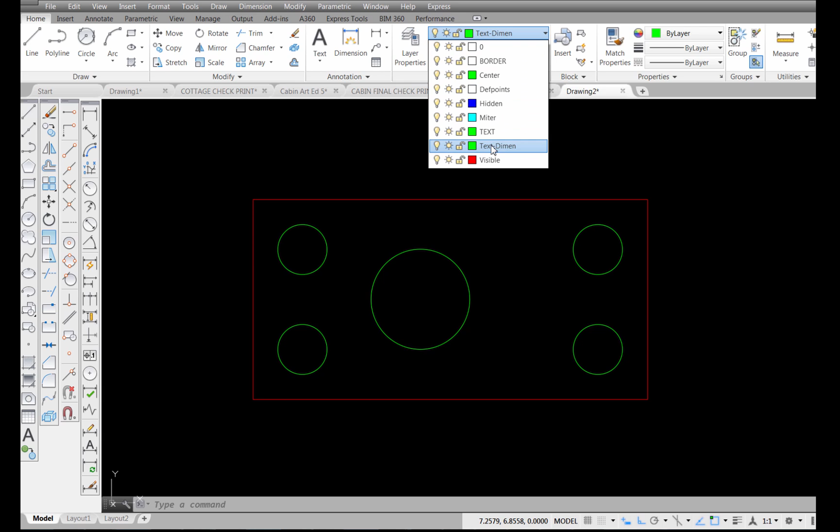One thing I should point out is that I've made a layer called text dimension that I made earlier. I've made that my current layer. I'm going to pick on the tool and come over here and select on the edge of the circle, and you can see it draws a plus sign in there to indicate where the center point is.

Now usually we like to have a center mark that has some lines that extend out from there, and of course that's not what we're getting here, so I'm going to delete that out and show you how to get the center mark that has the lines that extend out from it. Again, like I said, I have my dimension toolbar open.

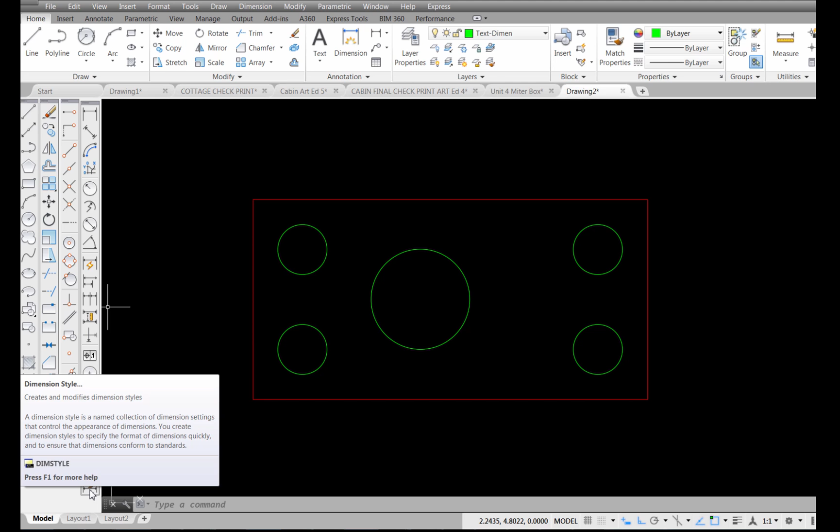The very bottom icon right down here is the dimension style manager, and if I click on that, it's going to open this box up right here that allows me to go in and change my dimension styles. Now you have one called standard, and what I'm going to do is modify the standard one. That's just the default one, so I'm going to pick on the modify button,

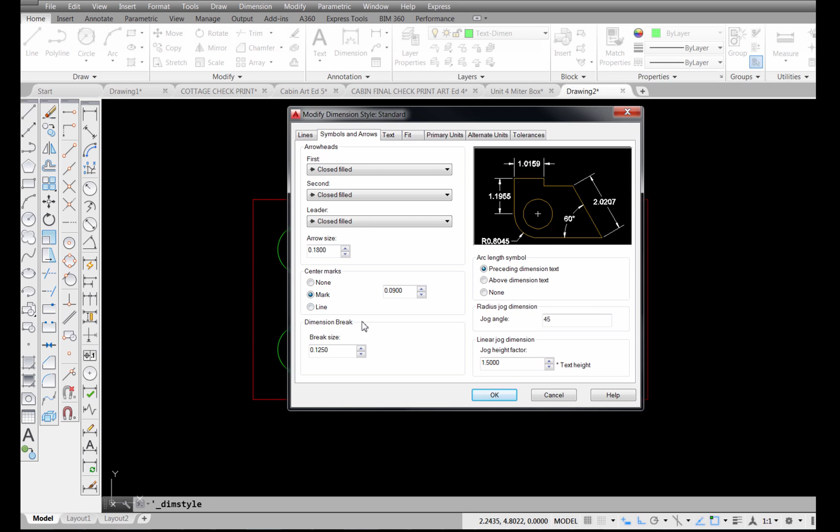and then there are some tabs across the top. Pick on the one named symbols and arrows, and you can see the little plus sign that I have in here. That's because under center marks, just the one for mark, this button is checked. If I pick on line, you can see how that extends that out. So I'm going to choose OK after I do that and close.

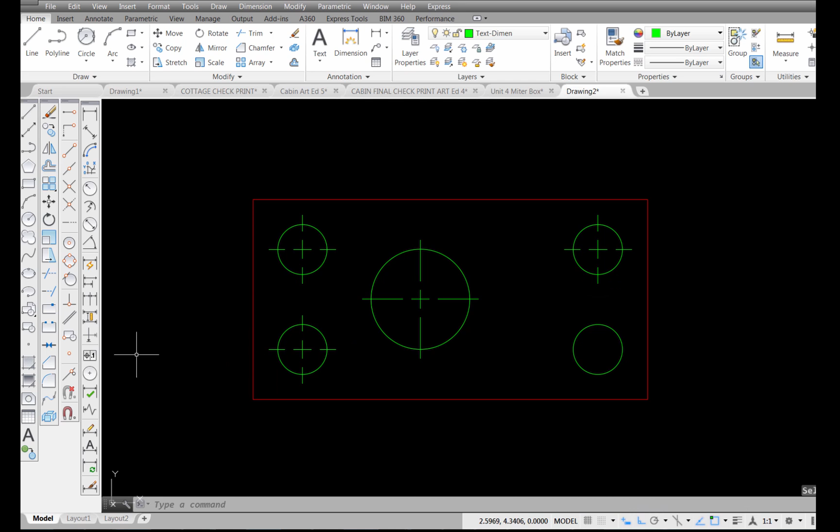Alright, so now that I've made that change to my dimension style, if I pick on the center mark tool and select the edge of the circle, you'll see what I get here is a much nicer center mark. If I pick on this one, choose again over here, and I can continue to do that with these other circles. Alright, now I'll press escape.

Now one thing I'm noticing is that my circles are green, which means that I drew those on that dimension layer. So I'm going to select all five of those, and come up here to my layer control and pick on the down arrow and choose the visible layer and send those to that layer.

Now if I come over here to my status bar, there's a tool right down here for displaying the line weight. So I'm going to pick on that so you can see the difference. In my layer properties, I have set up for the visible line to be 0.5 millimeters, while my center lines are set to default line thickness, and so is my dimension layer.

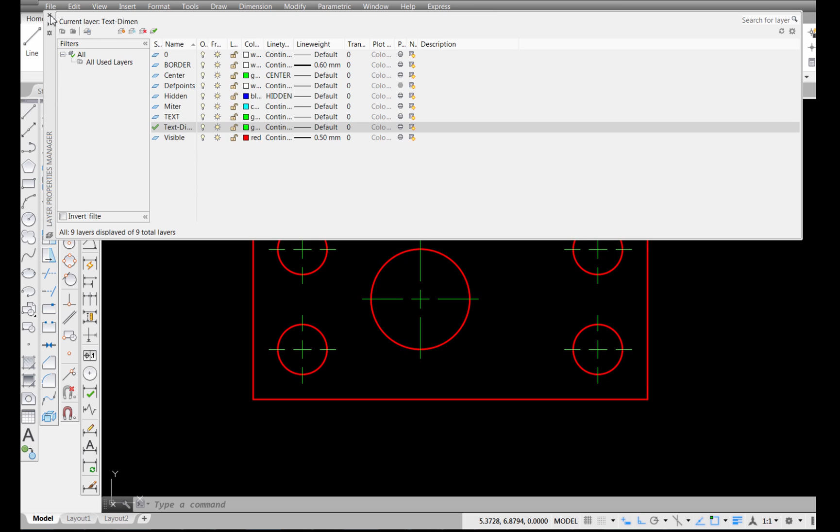With display line weight on or off, you can really see the difference in what you're going to get, especially when you send this to a printer, that the things that are in red, which are on the visible layer, are going to print thicker than my center lines, and that's how you want them to be printed.

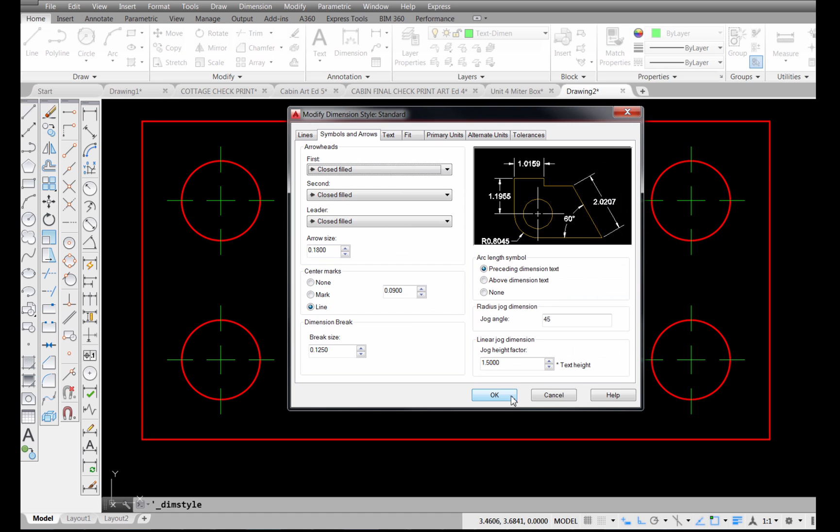Alright, so just remember that when you're ready to change this, you have to change your dimension style. So pick on the dimension style manager, go to modify, select the symbols and arrows tab, and pick line, and then pick OK and close.

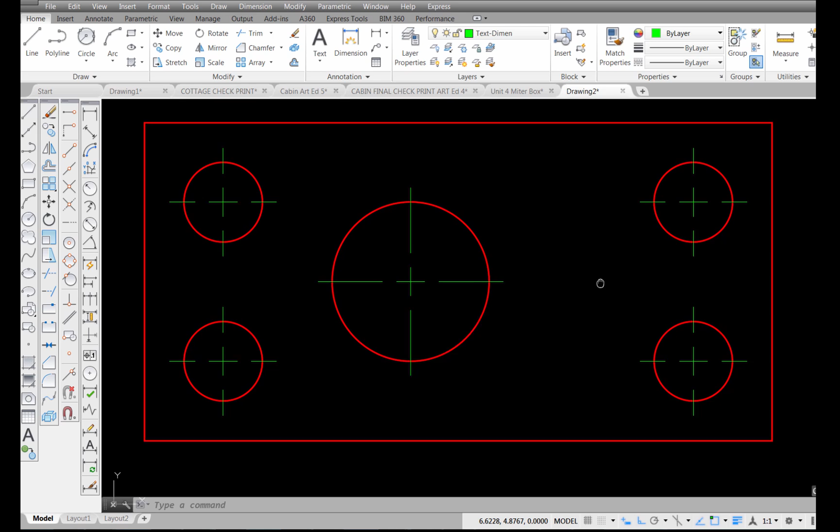Another way to get into that would be to go up here and on the annotation tab, pick on the down arrow and pick here on your dimension style, and that will also open up. If you don't have your dimension toolbar open, you can do it that way. Close. Alright, so that's just an overview of the circle command.